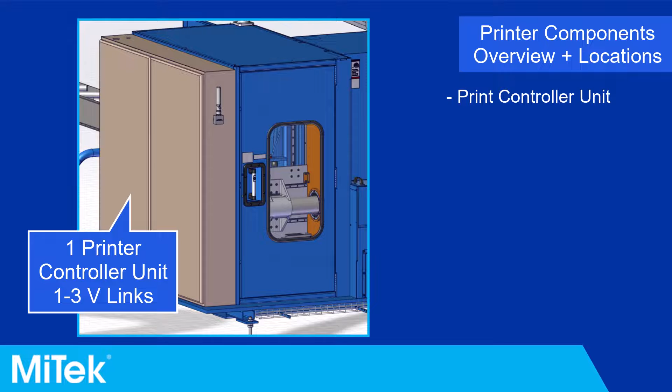Printer Components Overview. The printer is comprised of the following components: Print Controller Unit, Ink Supply System, and the print heads.

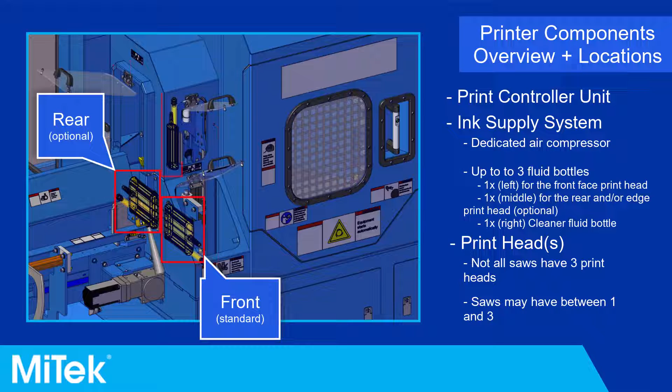Identifying your printer. Some maintenance procedures, such as flushing the system, differ based on which print head configuration you have. Not all saws are equipped with 3 print heads. If you're unsure which printer option you have, refer to your equipment manual.

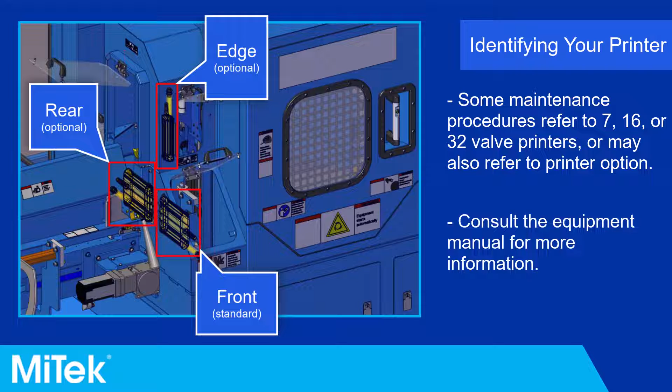Printer Options menu. The Printer tab in the Options menu can be found in the Blade 2 software by clicking on Tools, then Options, and Printers.

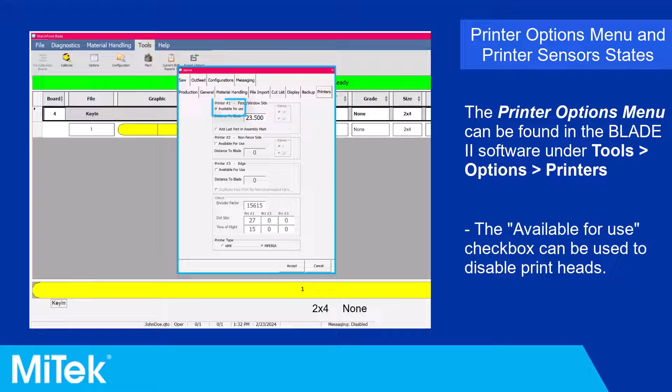Knowing where these options are can be useful for troubleshooting. Refer to the equipment manual for more information regarding the fields on the Printer Options menu. To see the printer sensor states, go to Diagnostics, then Detailed Diagnostics and Printer.

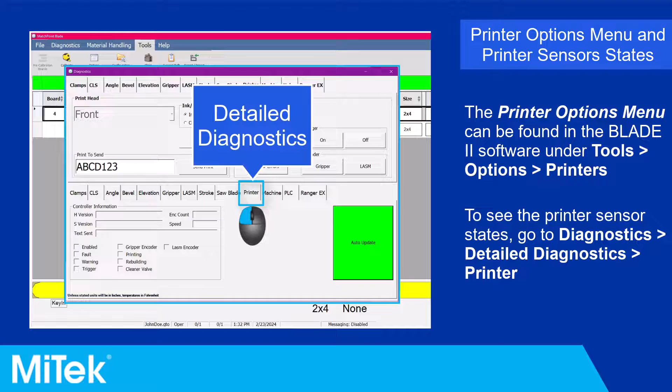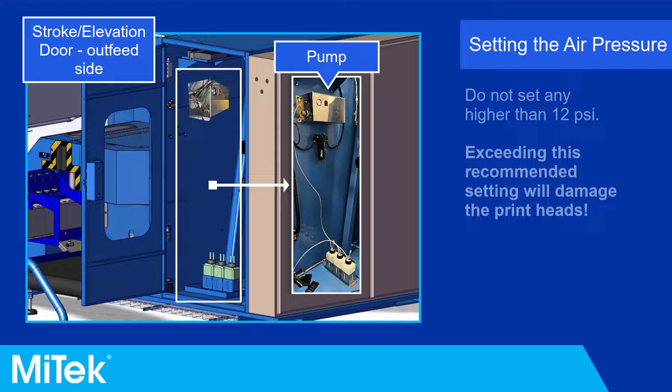Setting the air pressure. The pump that affects the printer system's pressure can be accessed via the stroke elevation door on the outfeed end of the saw. It must be set to no higher than 12 psi. Exceeding this recommended setting will damage the print heads. The printer's pneumatic system has a non-adjustable relief valve set at 15 psi inside the pump.

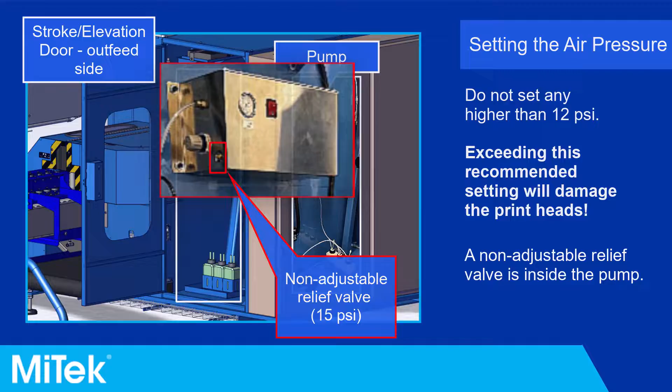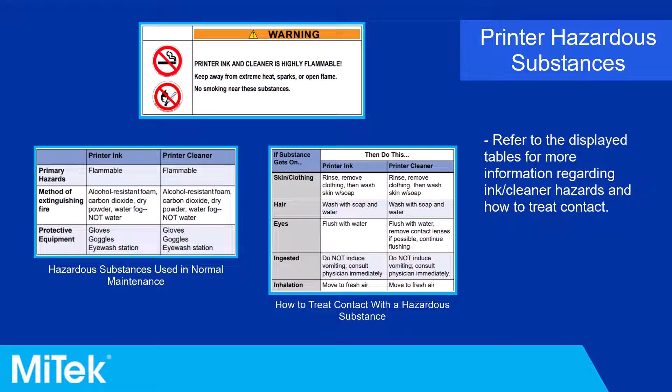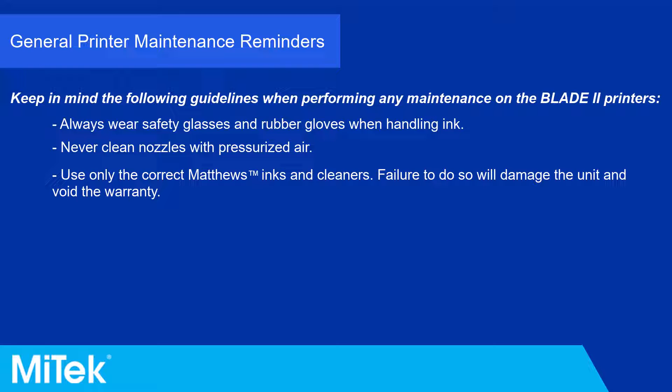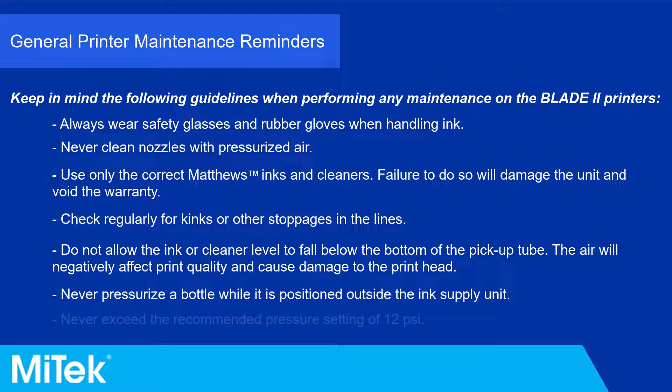Check regularly for kinks or other stoppages in the lines. Do not allow the ink or cleaner to fall below the bottom of the pickup tube. The air will negatively affect print quality and cause damage to the print head. Never pressurize a bottle while it is positioned outside the ink supply unit. Never exceed the recommended pressure setting of 12 psi.